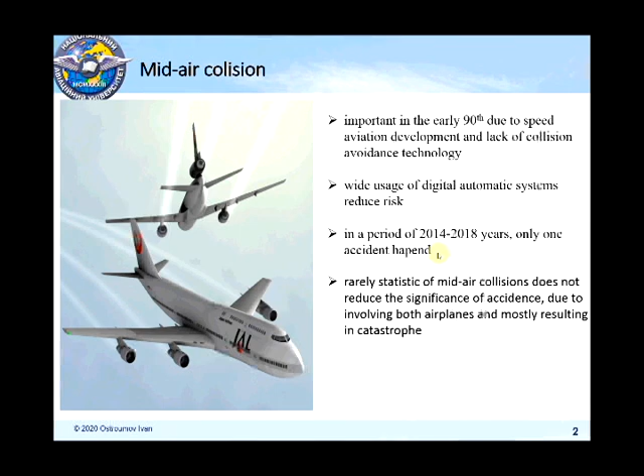But of course each accident is quite important because usually in mid-air collision we have both airplanes involved. It means that it will be a catastrophe of two airplanes and probably a very dramatic situation. That's why the problem of mid-air collision is highly important in current aviation safety.

But how can we estimate a risk of mid-air collision? Unfortunately, we can refer to this event as a highly rare event because for 4 years it happened only once on the globe. That's why if you would like to estimate a risk value, for example for Ukrainian airspace, we don't have enough statistics to make a prediction according to statistical data.

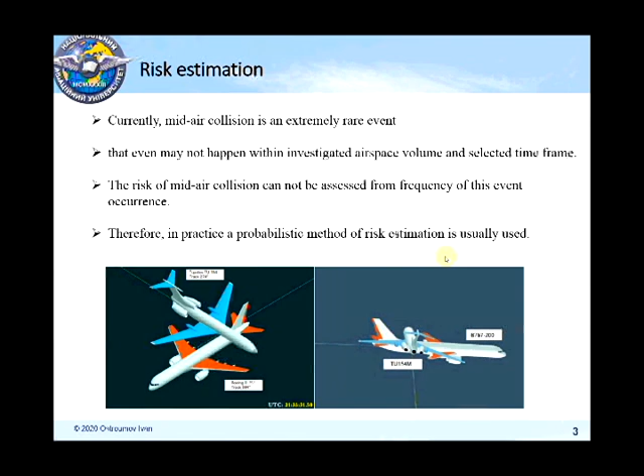But in this case we can use modern simulation tools to simulate air traffic. Then we can speed up our process a little bit, and we will get some results of unintentional aircraft deviation and probably mid-air collision. Only in this case can we talk about risk and assess some values for this risk, for example some probability values or the probable number of collisions during some period of time.

That's why usually at first we are working with different statistics and we estimate different aircraft trajectories. In this picture you can see a lot of aircraft trajectories, and you can see the middle of this track. Ideally all aircraft have to fly along the line, but in a real situation all of them deviate a little bit. That's why we can estimate this deviation statistically.

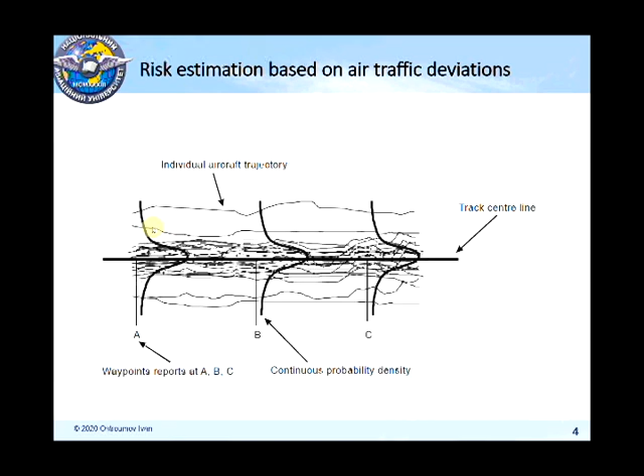Usually in this step we use different probability density functions, which you can see here, and then by the parameters of these probability density functions we can estimate the probability of aircraft unintentional deviation from the pre-planned trajectory, and then we can use it for risk of mid-air collision estimation.

But before we talk about risk, let's talk a little bit about separation, because aviation is a little bit different from road traffic. To ensure the required level of aviation safety, we use three types of separation. Each airspace user has to be separated from other airspace users in vertical, horizontal and longitudinal planes.

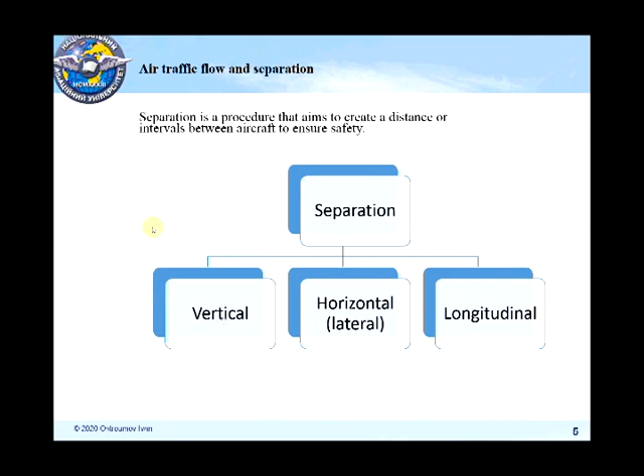Vertical separation is a scheme by which airspace users can use specific flight levels, and usually some flight levels are directed in one direction and the next flight level in the opposite direction. So on one road in the vertical plane we have a lot of layers which we call flight levels, and at each flight level we can perform our flight. Usually flight levels are assigned to a particular aircraft by the air traffic controller.

Usually for flight levels below 290 we use 300 meters between airspace users, and above flight level 290 we use double spacing, 600 meters, to separate all airspace users.

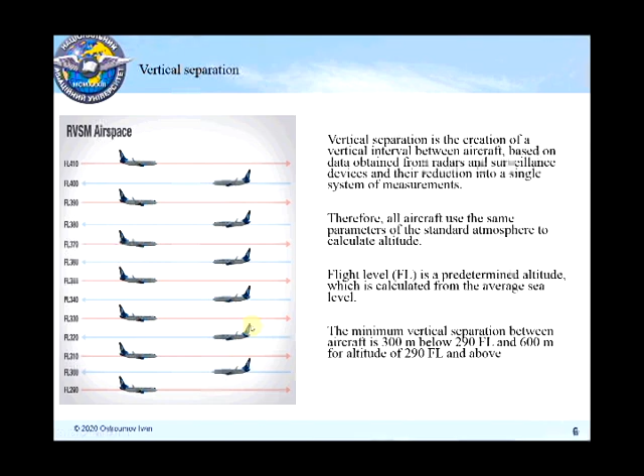Lateral and longitudinal separation may be different, but nowadays separation based on performance-based navigation requirements is widely used in the modern air traffic scheme. According to that, we have a set of navigation specifications from 1 to 10, and for each of these specifications we have some values for separation. For lateral separation, for example, for RNP1 we have 5 nautical miles, for RNAV1 7 nautical miles.

What does it mean? It means that the horizontal distance between airspace users, for example in Ukrainian airspace, has to be 5 or 7 nautical miles. It depends on airspace type. And for longitudinal separation minimums, you can also see here that for RNP 4 and 2 we have 30 nautical miles.

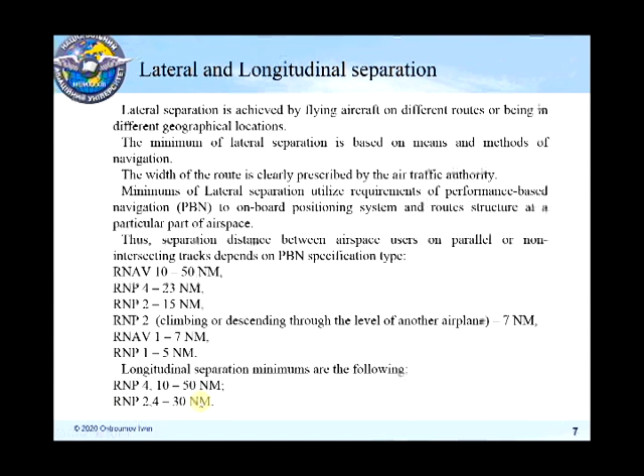Next, usually in tasks of risk estimation we use some specific aircraft models, and in this case the most suitable is the box model. That's why each airspace user in the risk simulation model can be represented as a box with a specific size: width,

length and height, and this size we've got from our separation minimums, because in air traffic it is highly important that each airspace user uses a specific volume of airspace, and it means that no one else can be inside the safety volume of another aircraft. And usually this safety volume is the separation minimums in some particular airspace.

And in this case each box airspace user has particular components of speed, horizontal, vertical, and longitudinal, and the risk of mid-air collision in this case can be represented as a probability of overlapping or crossing of two or more boxes in space.

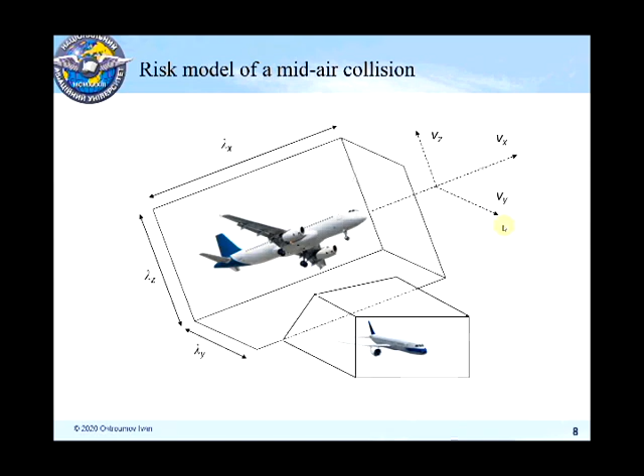That's why if we know the predefined trajectories of airspace users and we know the separation minimums, we can create boxes which behave like real air traffic, and then use them for risk estimation to get a probability of crossing two or more boxes in some particular airspace.

Okay, and in risk estimation, usually scholars separate two types of risks: risk of lateral or horizontal overlap and risk of vertical overlap. It comes from different sensors for airplane coordinates estimation, because for lateral navigation usually we use global navigation satellite system, or in particular some navigational aids.

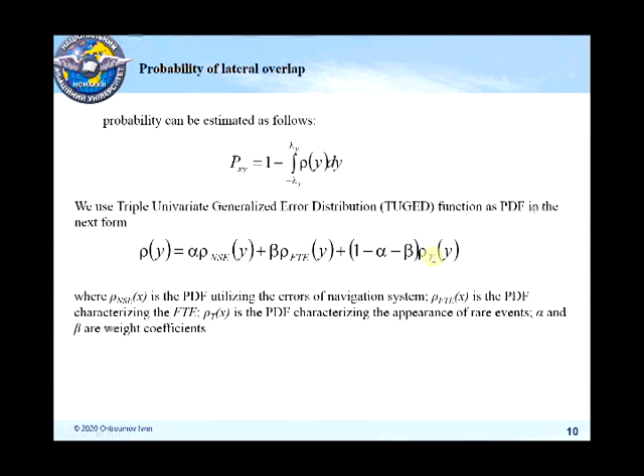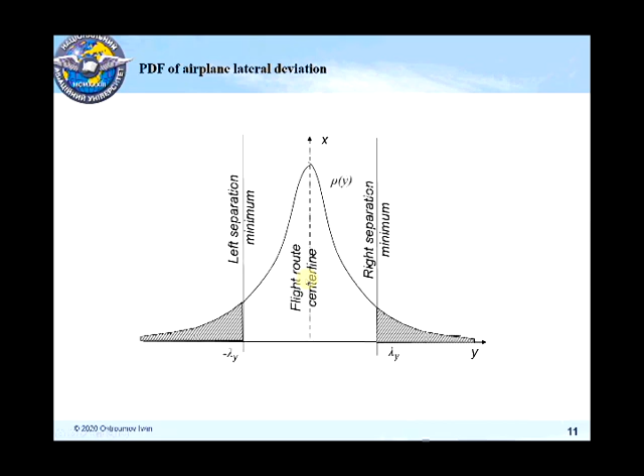If we have a predefined trajectory of an aircraft, and a lot of realizations of this trajectory, then we can rebuild our probability density function. And as a model of this probability density function, we cannot use just the normal density function, because it does not give us the opportunity to take into account errors of the positioning system and errors of human operation, flight technical errors. And of course some rare events may occur, so we need to take them into account. That's why we use a more complicated form of probability density function to estimate airplane deviation more precisely.

The triple univariate generalized error distribution in full form can be represented as follows. And here on my slide you can see a description of all of these parameters, which we obtain by the maximum likelihood method from statistical data.

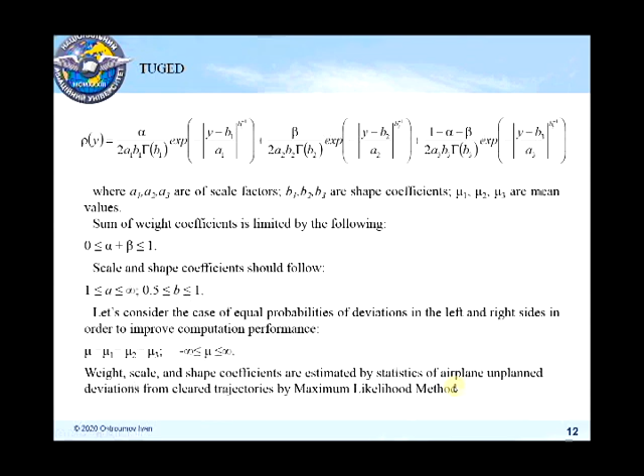For numerical demonstration in our department, we use data from the automatic dependent surveillance broadcast concept. According to the ADS-B concept, each airspace user has to be equipped with a special transmitter which can transmit, in non-synchronized and non-coded mode, a location report at some particular time.

So everyone in controlled airspace has to transmit their location from the global navigation satellite system receiver located on board the aircraft. And these reports we can easily receive, then decode and obtain the data. In this figure you can see my laptop with a software defined radio and one of our antennas by which we can receive air traffic above the Kiev region.

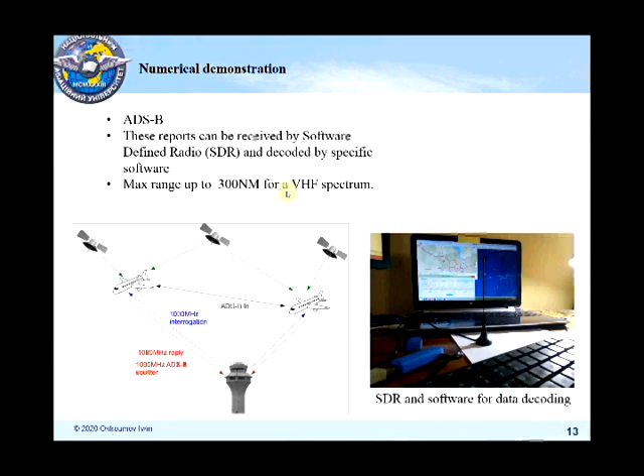Okay, if we know the location of each airspace user for a particular time, then we need to compare their location with routes, because each airspace user has to fly a particular route. In the aeronautical information publication of Ukraine, we have an aeronautical map. These blue routes are routes where aircraft can be located, basically, if it is a civil aircraft.

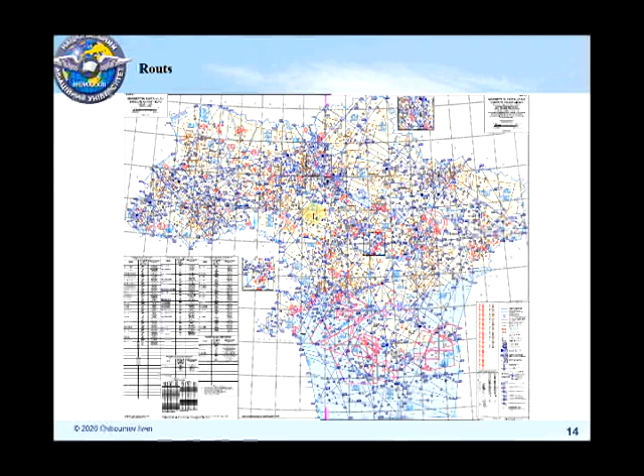We've got these routes in digital format, and we can easily compare the closest point of the location of each airspace user to the route. That's why we can detect the deviation of each aircraft from the predefined trajectory. And then we can record the data, as much as possible. That's why we've got 30 minutes of data. This data was recorded on April 23, 2019.

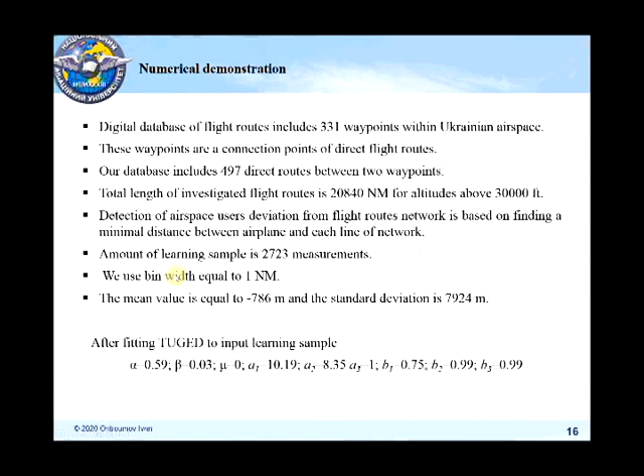Okay, and also in this slide you can see the result of our fitting by maximum likelihood method of our statistical histogram. The coefficients in this target function we've got like this one.

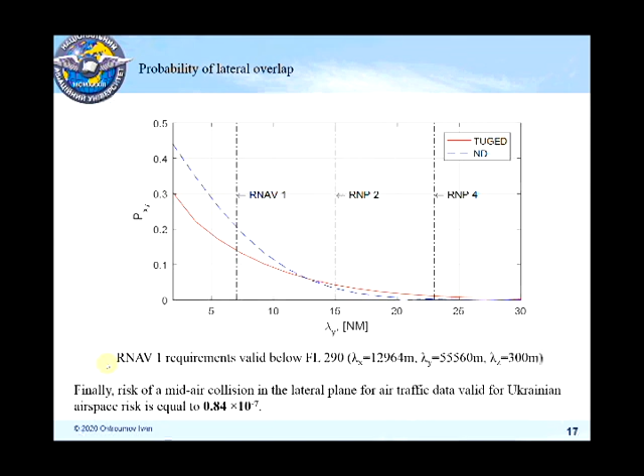Okay, and after that, if we know the probability density function of airplane deviation in Ukrainian airspace, then we can easily detect the probability of aircraft deviation in the lateral plane. For different box lengths, lambda y in nautical miles, we can obtain different probabilities, because it is a result of an integral. Thus, you can see that in Ukrainian airspace we've got RNAV 1 performance. It is the requirement for the onboard navigation system.

You can see that according to the normal density distribution, this probability has to be approximately 0.21, but according to the triple univariate generalized error distribution we have 0.15. That's why we estimate more precisely the probability of airplane deviation to the left and right sides of the flight track.

And finally, we put this data in the Reich formula and obtain the probability of mid-air collision for the whole Ukrainian airspace based on the statistical data that we have, and for a box size which corresponds to the area navigation performance of RNAV 1.